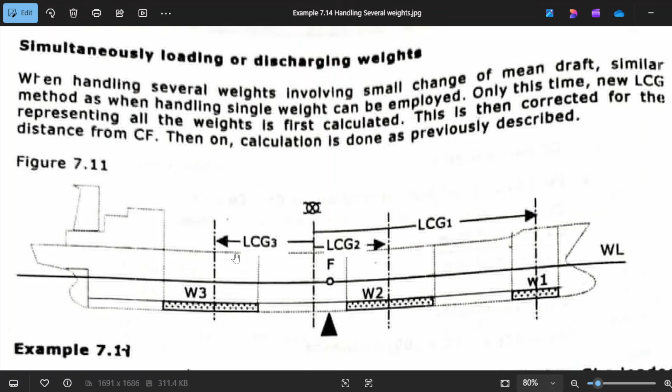Okay, so the example is 7.14, I think so. Check, guys. 7.11. So this is 7.14. Okay, so this is 7.14, and the vessel MV Max Panama had an initial forward draft of 3.75 meters, and aft draft is 7.09 meters.

She loaded IFO, MDO, freshwater to the following tanks and compartments. So it's loading FO and DO and freshwater. Okay, so this is FOT number 1, loading of 350 metric tons, and this is the LCG. Number 2 FOT port is 150, LCG is negative 9.67, FOT number 2 starboard, loading 200 metric tons, and the LCG is this one. And number 4 FOT tank, which is found in the center, loading of 250 metric tons, and the LCG is 42.95.

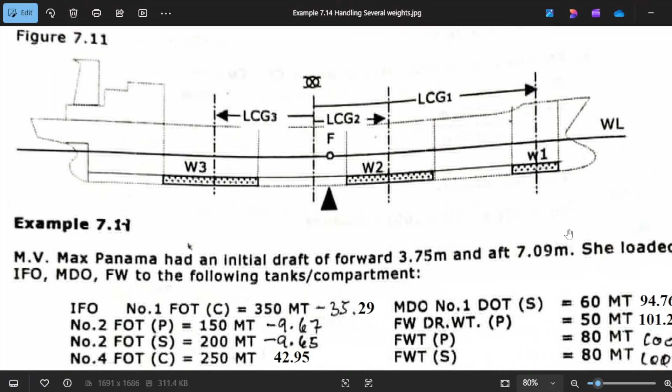And she will also discharge ballast water from the after peak of 589 metric tons, and the LCG is 104.15. Take note that after peak is positive, the LCG is positive, while the number 1 FOT forward or center is negative LCG. Okay, so meaning if the tank is somewhere around here, the LCG is negative. But if it is aft from the center or from the midship, the LCG is positive. Okay, that's why your after peak tank is positive.

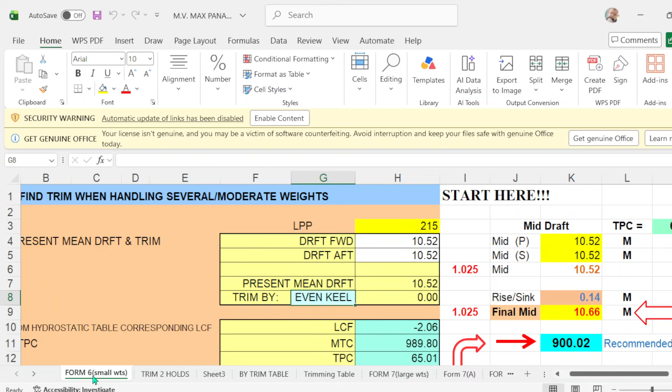Okay, so we will apply this to our program. I already entered this to the program, which is Max Panama. This is to show you. This is the name of the vessel, MV Max Panamax, or Panama. Then I use the program instead of using Form 6, which is this one, because this one is automatic. See? This is all automatic. So I use the manual.

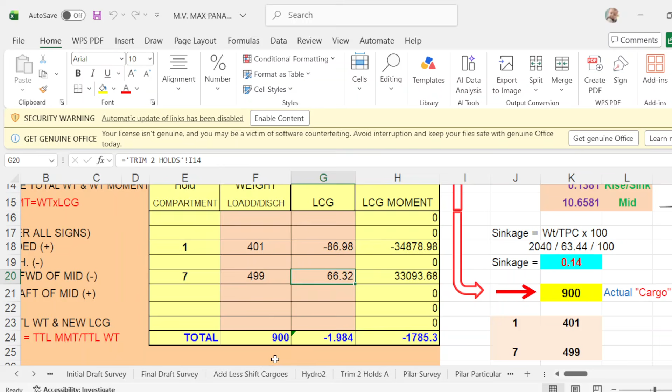So I go forward and I use this add. You add cargo or less, meaning you discharge or you shift cargo. So I use this one, and this is how it looks. Okay, it is also the same how to find trim when handling several weights. Okay, we will put now the initial draft. The initial draft forward is 3.75.

Okay, then you put 3.75, and aft draft is 7.09. Aft draft is 7.09. So you put 7.09. Take note that the present mean draft is 5.42, and it is trimmed by the stern.

Take note, guys. I will change this trim. I will put this to, let's say, 5, and this one to 2. Take note of the trim. Now it's trimmed by the head. It's trimmed forward, which is now negative 3. Okay. So if you put back the actual draft, it's by the stern of 3.34, and the midship is 5.42.

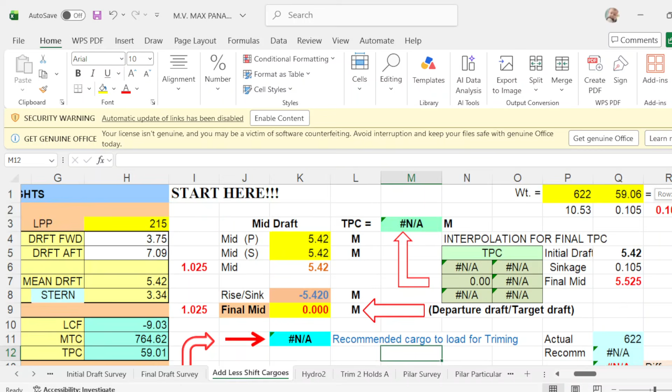Okay, we don't know the departure draft. So what you do is to put all the weights in your program. Okay, so I put here FOT number 1 center, the weight is 350, and LCG is negative 35.29. 35.29, right? That is the LCG. And number 2, FOT port side 150.

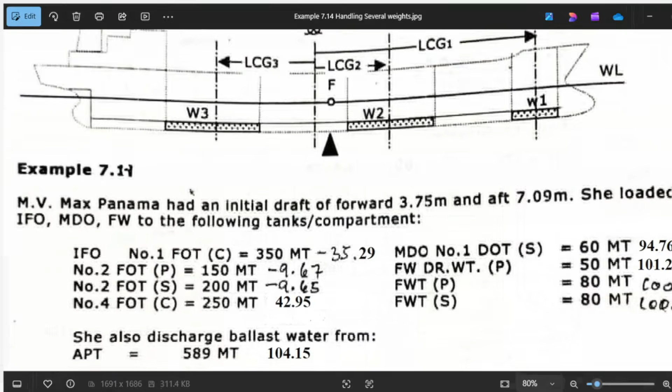FOT 2 port side 150, LCG is negative 9.67. LCG is negative 9.7. Then the next, FOT 2, now on starboard side, you load 200. Okay, she loaded IFO, DO, freshwater to the following tanks and compartments. So we are now in starboard side of FOT number 2, loading 200 metric tons. FOT 2 starboard, 200 metric tons, and the LCG is negative 9.65. Number 2 starboard is negative 9.65.

And next will be FOT number 4 center, loading of 250 metric tons. So FOT 4 center of 250 metric tons. The LCG will be 42.95. Then the next will be DOT number 1 starboard, 60 tons. So DOT starboard number 1, 60 tons, and the LCG is 94.76.

94.76, okay? And freshwater, drinking water on port side is 50 tons. Drinking water, port side, 50 tons. LCG is 101.2. And freshwater tank port side, 80 tons. Freshwater port side, 80 tons. And LCG is 100.99.

And freshwater tank starboard is 80 tons. LCG is 100.99. Freshwater starboard side is 80 and LCG is 100.99. All these figures are positive because you are loading. Okay. It says here. Where is that? Sir, consider all signs. When loaded, they are positive.

So aft peak discharge of 598, that will be negative, and LCG is 104.15.

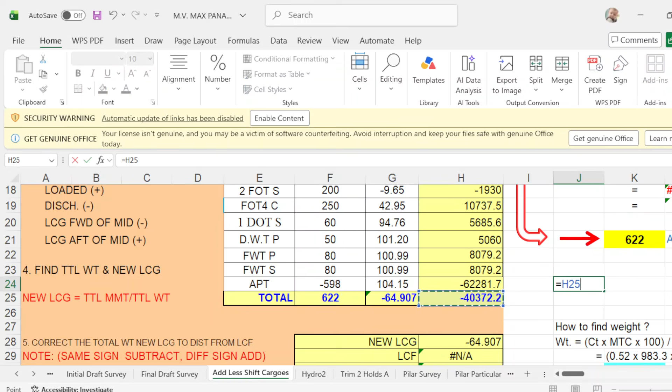And the total LCG moment will be negative 40372.2. To get the LCG, LCG moment divided by your total weight will be your final LCG. So your new LCG is 64.907. So we'll double check. Your new LCG is the LCG moment divided by your weight, and this will be your new final LCG. This is how you get this one.

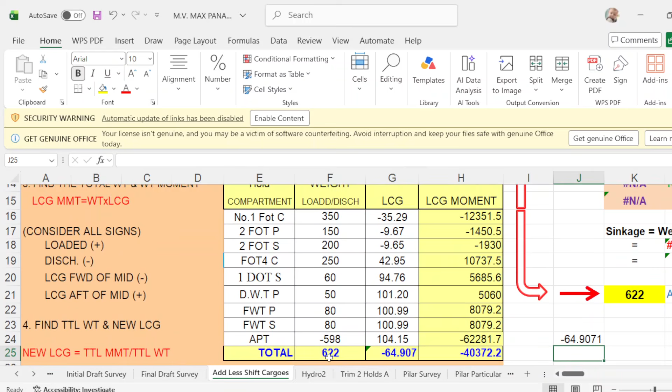Then scroll down. Since you know already the weight, you put the weight here, 622. And the TPC from your initial draft is 59.01. So put here 59.01. So your weight divided by your TPC is 10.54. Divide this by 100, that will be 0.105 meters.

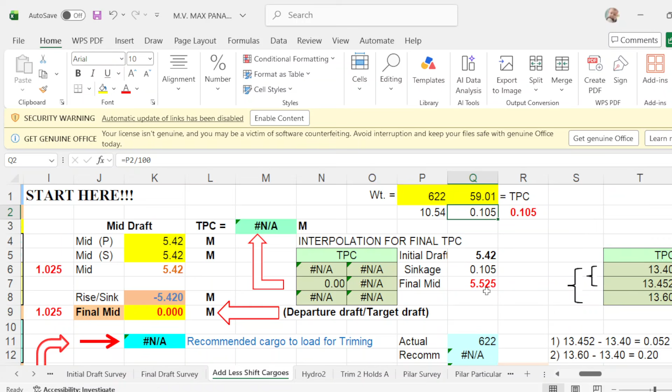So your initial draft is 5.42 plus your sinkage of 0.105, and your final mid will be 5.525. This will be your departure draft. With this figure, you put it here, your final mid. Put 5.525, press enter. Then your recommended cargo total for trimming is 620.

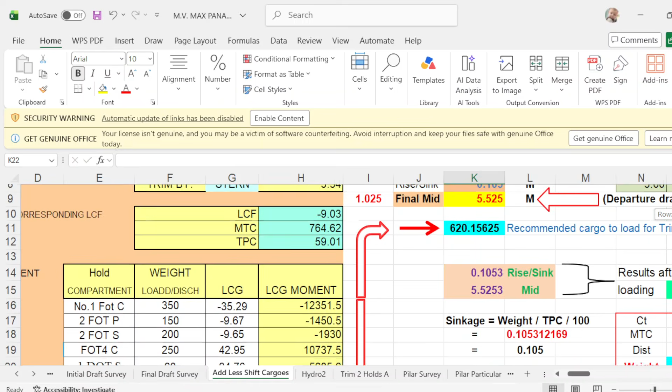But according to our program, you have already loaded 622. So since you follow this arrow, you put here 622. What happens if you load 622? Results after loading 622: your mid draft will be 5.525, which is almost the same here, and your sinkage is 0.105. That's how you get your sinkage.

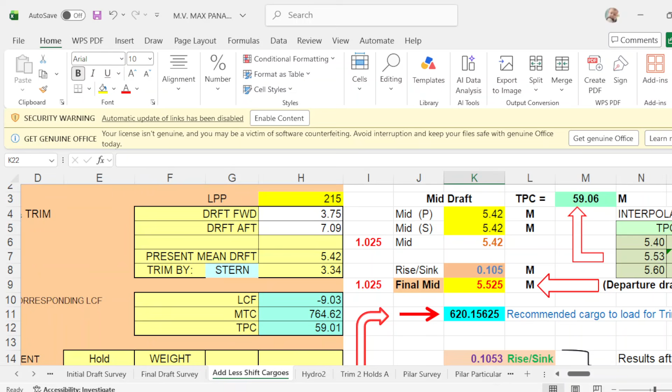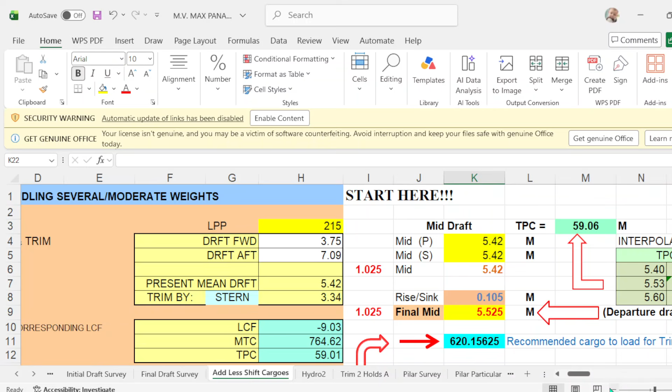Another way to get the sinkage is your final mid draft of 5.525 minus your mid draft of 5.42, which is 0.105. This is almost the same here. The other way of getting the sinkage is weight divided by TPC divided by 100. Your weight is 622 divided by TPC of your final mid, 5.52 or 5.53, which is 59.06.

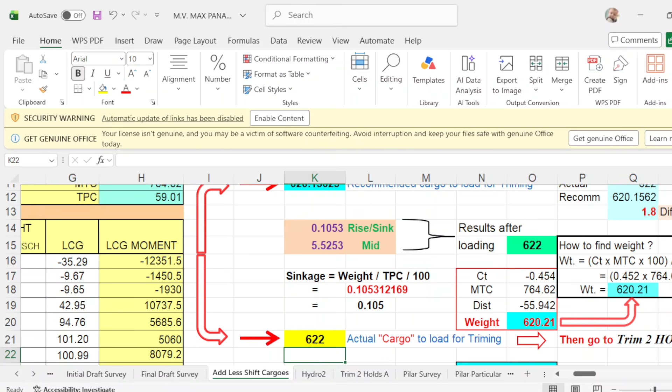So weight 622 divided by TPC of 59.01, divided by 100, then your sinkage is 0.105, which is almost the same here. So there are two ways now. Departure draft of 5.525 minus your mid draft of 5.42 will be 0.105. And the other way is weight divided by TPC divided by 100, that will be 0.105. Your weight is 622, your TPC of your departure draft is 59.01, divided by 100, then you will have your sinkage here.

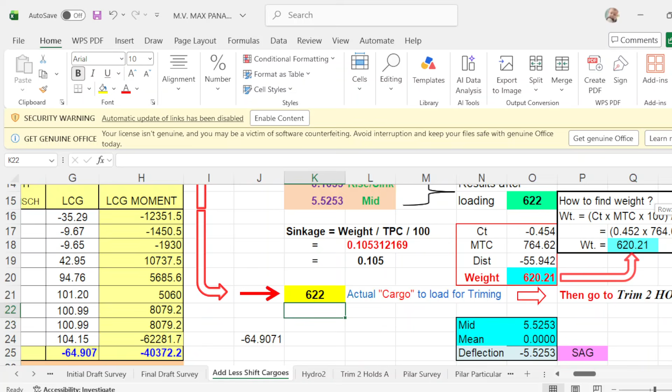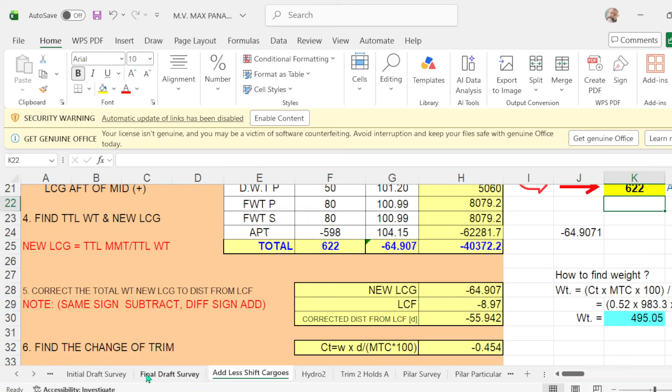Okay, then how to get the weight? How to find weight, how do you call this one? The trim. This is what you call the change of trim. Okay, change of trim. This one.

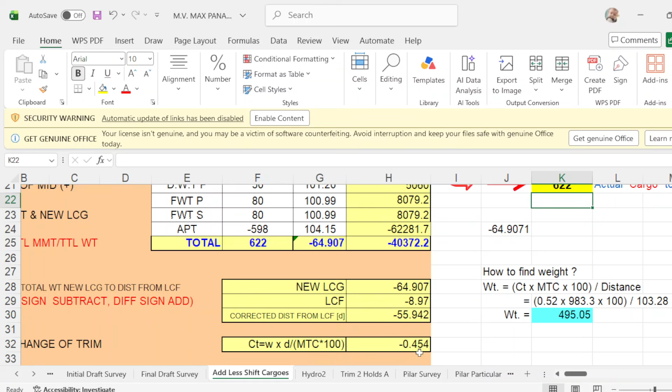To find weight: change of trim times MTC times 100 over distance. So what is your change of trim? This one: change of trim, MTC, and distance. So what is your change of trim? It is 0.454. Change of trim.

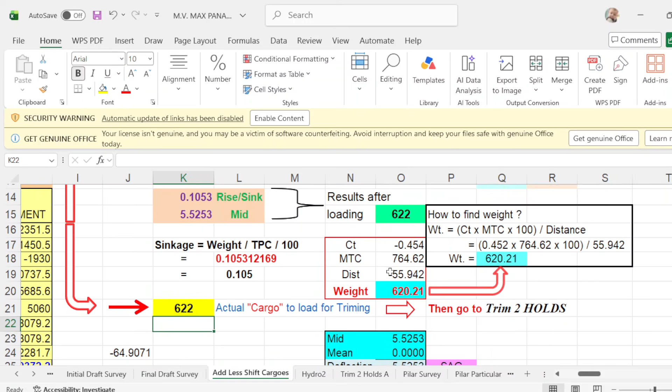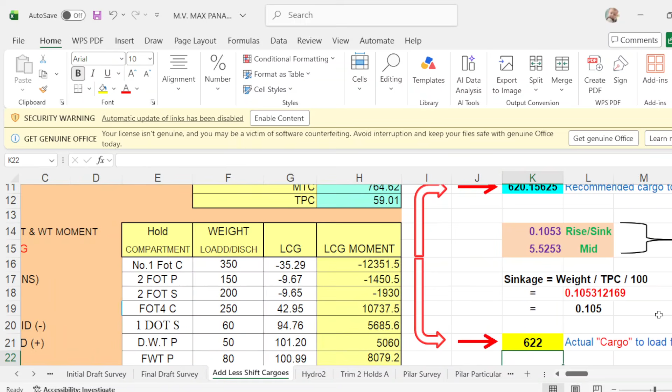0454, MTC is 7. From your initial draft is 764.62, and distance is negative 55.942. Distance is 55, that is the distance. This one. Corrected distance from LCF is 55.942. This one. 55.942. So change of trim is

0454. Put this 4. Okay. And MTC is 764.62. Okay. Times 100 over your distance of 55.942. Okay. 454, 764.62, and 55.942. And the weight is 620. But according to the program here, the weight should be 622. Okay.

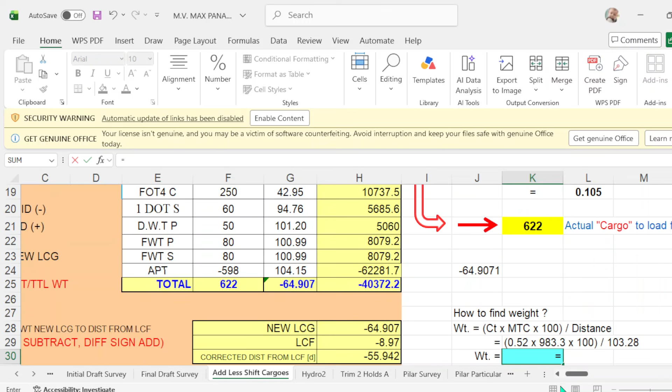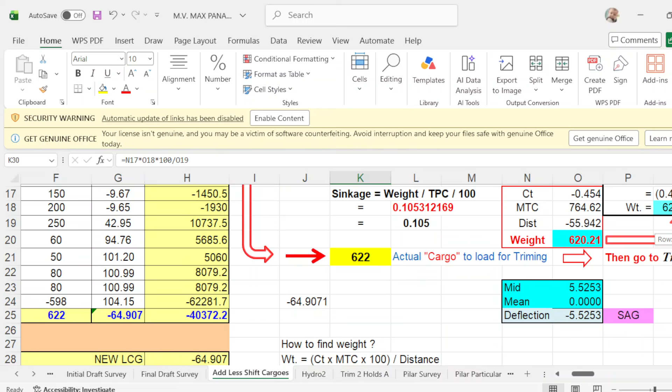What is the distance? Should be 55.942. Okay. Your trim should be 0.454. Okay. And your MTC should be, how much your MTC? 764.62.

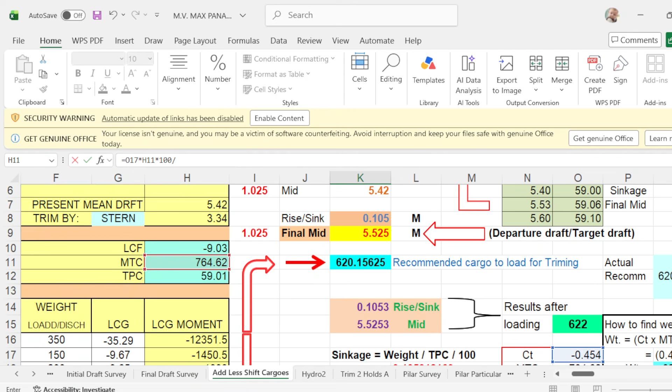Okay. Again, that equals change of trim times MTC times 100 divide distance. Your distance is 55. Push enter. There. Should be 620 according to the formula, but the program says 622. Okay? And what will be the draft after completion of this operation?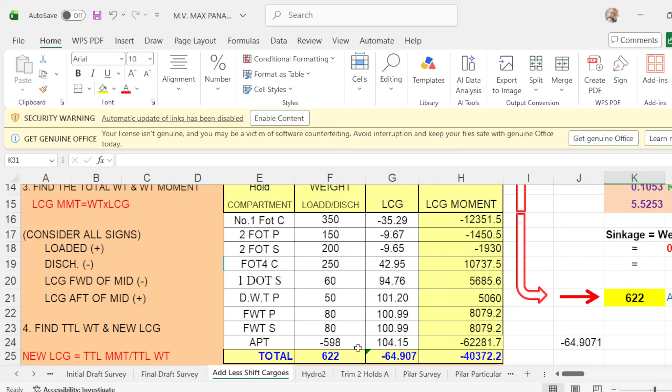You load these weights and discharge after peak of 598. Your final draft would be, forward draft will be 4.06, your aft draft will be 6.95, your trim will be 2.88 and mean draft will be 5.506, which is the same here. Mean draft is 5.506 and your trim is 2.886. Okay, that will be your mean draft.

Okay, so assuming that your total weight to load is 622. Then you go to trim holds 2. Then you have there 622. This is your initial draft, mean draft, and your trim, and MTC, LCF, and your TPC. Assuming this is a Panamax vessel that you're going to load 622 metric tons to 1 and 7. This is now different from this problem, okay? This is just additional information.

So with 622 tons, you're going to distribute this value to holds 1 and 7, for example, or we say 2 and 6. Put this to hold number 2 and hold number 6, okay? There. And they say, how much will be your trim? Trim says 2.88, so we put it 2.80, okay? So trim will be 2.80.

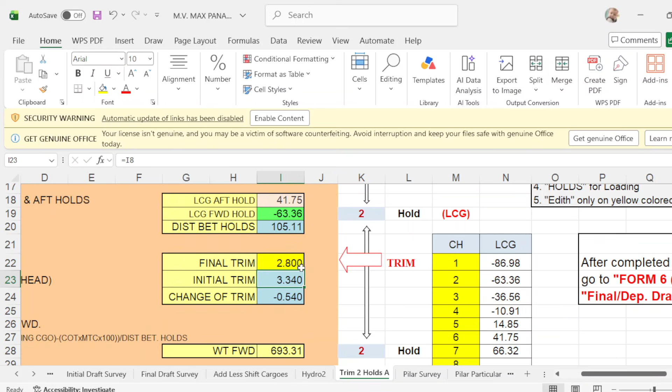So you have to load in number 2, or make it even keel, for example. Too much. Let's make it 2 meters. Let's make it 1.5 meters. Okay. So 1.5 meters doesn't work, because it's too much. You have to load 1,638, but you have only 622. So what do you do? 2.90. There you go.

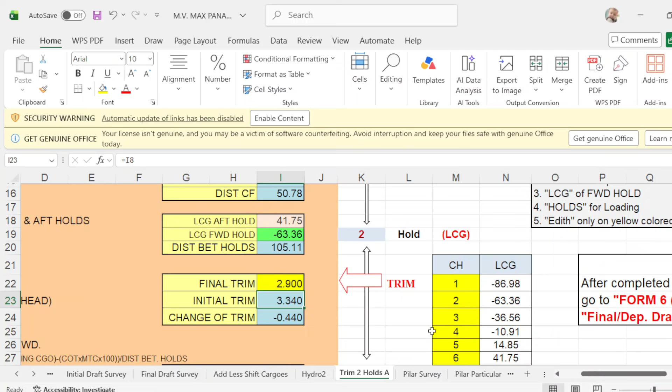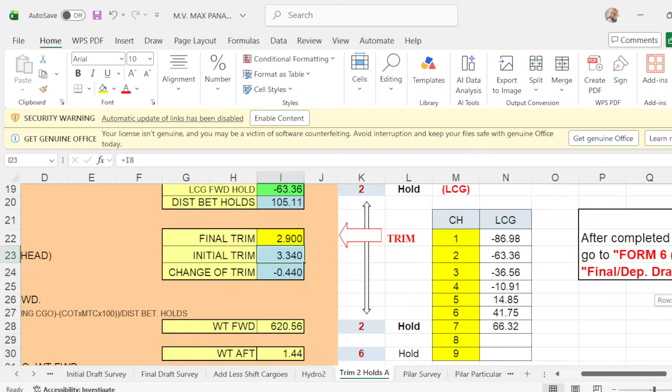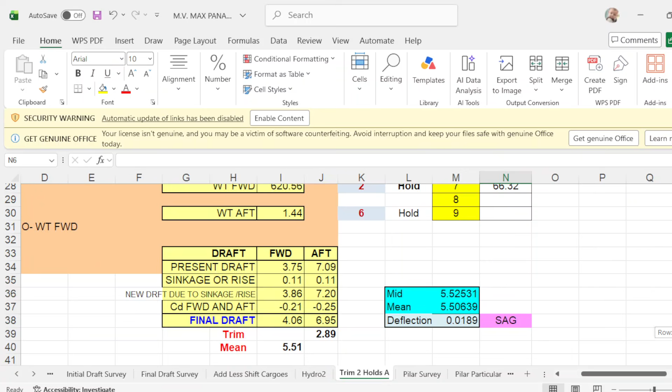Then you have to load in number 2 is 620. Okay, you put 620. And in number 6, you load 2 metric tons. Okay? And what will be your final draft? Draft forward is 4.06. Aft will be 6.95. Your trim is almost 2.89. And your mean draft is 5.51. Okay? This is assuming that you're going to load in hold number 2 and 6.

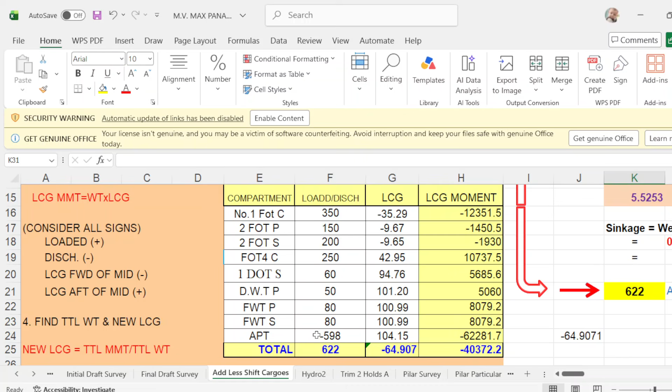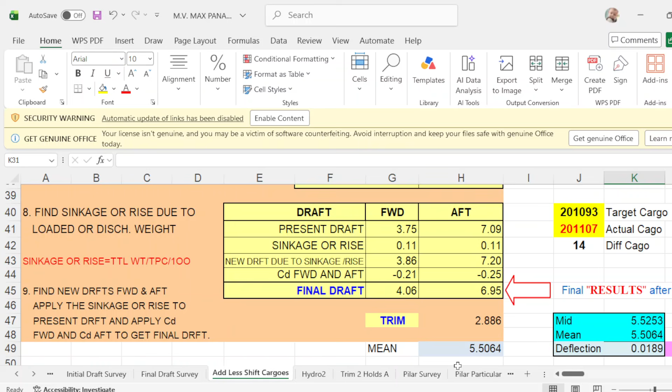This is for cargo, but the actual situation is when you load FOT center number 1, number 2 FOT starboard, FOT number 4 center, and you load diesel oil at DOT 1 starboard. You add water in drinking water port side, and port and starboard fresh water, you load this value. But you discharge your ballast water after peak, and the total weight to be loaded on board is 622. And you will arrive to this draft of forward 4.06, aft 6.95, trim 2.88, and your mean draft is 5.506. Which is this one.

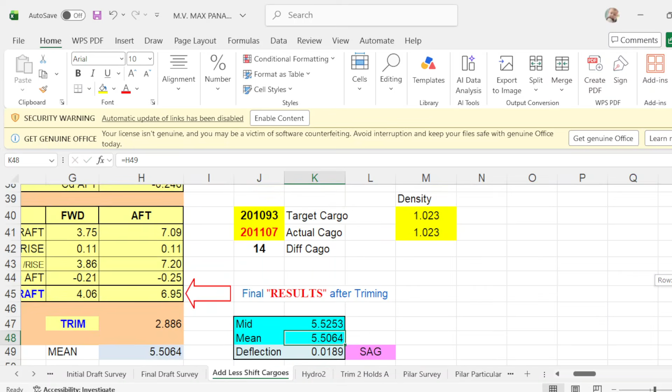If you apply all these tanks and the LCG, you will arrive to this draft. And the deflection will be 1 centimeter, almost 2 centimeters. How do you get the mid? Click this one, and your mid will be this one. When you load 622, this will be your mid, and your mean draft, put equals there, this will be your mean draft. And your deflection is your sag of 1 or 2 centimeters. Well, that's okay, because it's better to have sag than hog.

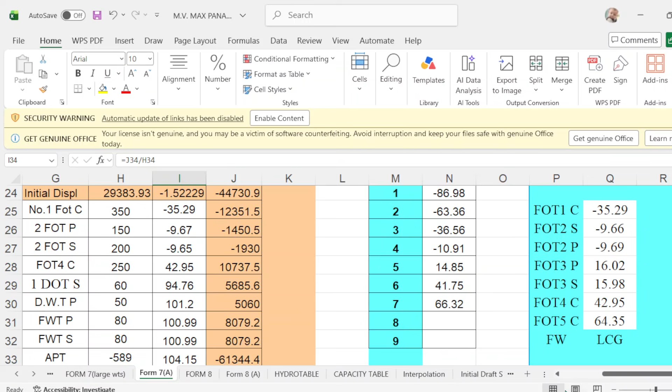So that's it, guys. This is how you apply this program here. Let's say we apply this to number 7. Okay, for number 7, the same thing.

You put the initial draft 3.75, and aft draft is 7.09. The mean draft is 5.42, and trim is 3.34. The initial density is 1.025, and upon completion of the operation it is 1.025. Okay?

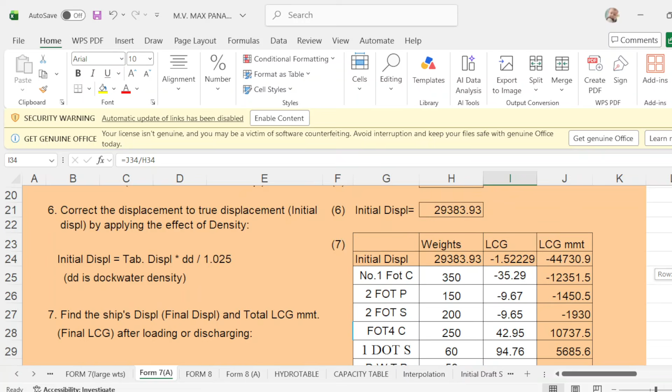Then you apply the tanks. No. 1 center, 350, No. 2 port, 150, and LCG is negative 9.67, and number 1 center is 35.29. FOT starboard 200, LCG is negative 9.65.

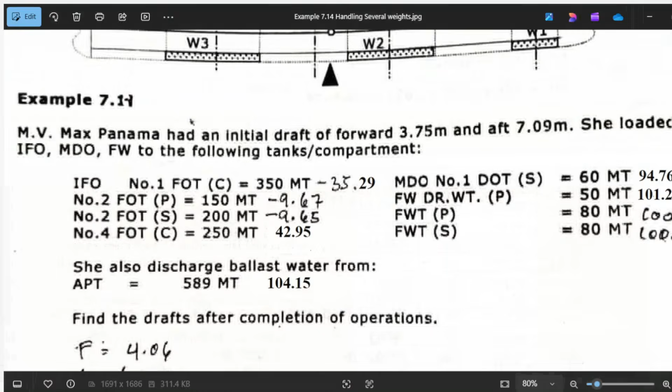FOT 4 center 250, LCG is 42.95. DOT 1 starboard 60, and LCG is 94.76. Drinking water port side 50, and 101.2 LCG.

Freshwater port side 80, LCG is 100.99, and starboard is 80, LCG is 100.99. And your after peak is 589, and LCG is 104.15. Okay. So it's confirmed.

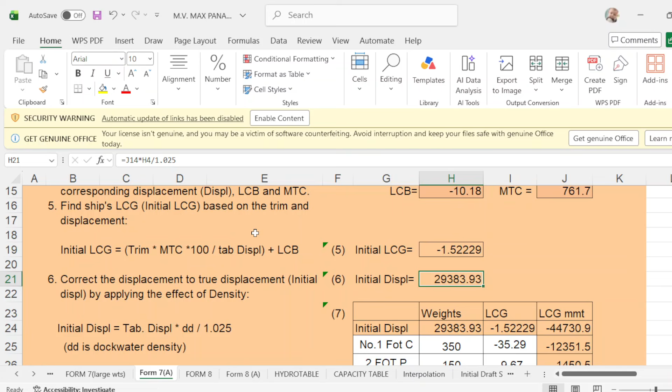I'll double check on this one. Okay. Correct. And this one. Then your midship draft should be 5.38. Midship draft is, there's something wrong here. So what you do, we double check. H34, 1.025 divide. Baliktad pa, I think. Double check, guys. Check this one.

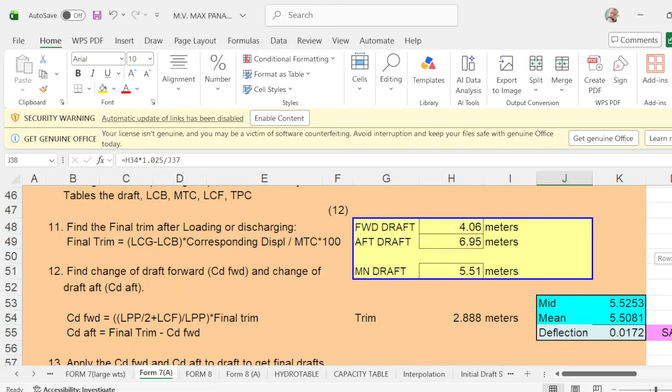Then we go to this one. That's 1.025 divided by J37. 5.28, 5.27. What will be LCB? LCB is 10.15, MTC 763.92. TPC 58.99. LCF negative 9.05. LCB 10.15. Okay.

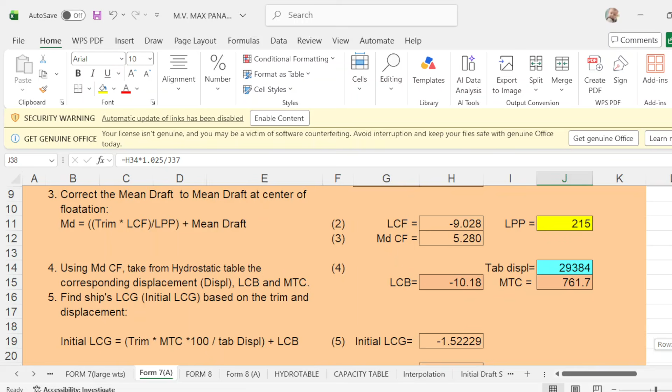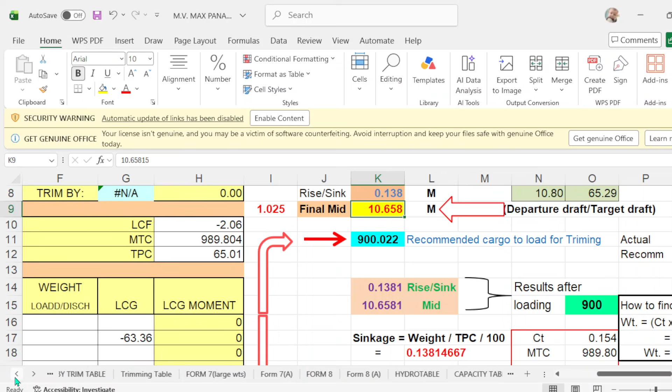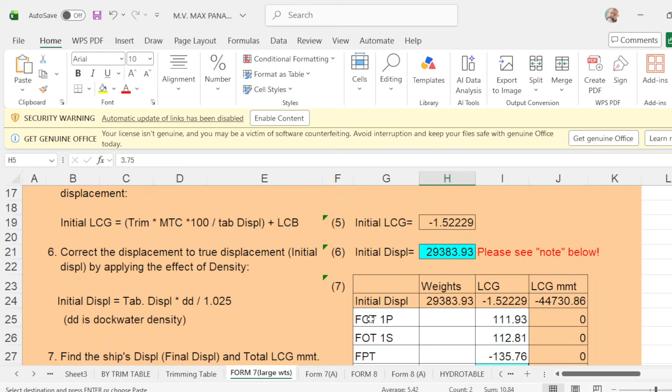The mean draft should be 5.51, but what it got here is different. There's something wrong with this program. So what we do, let's put it this way. I'll show you the program. Copy, put it here, paste. There you go. Then from here, you copy this one, go down, paste. There you go.

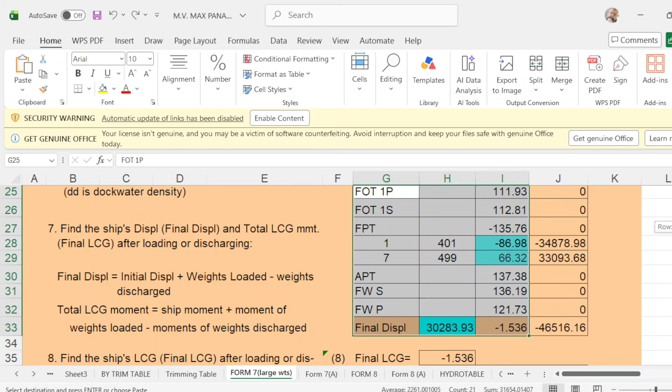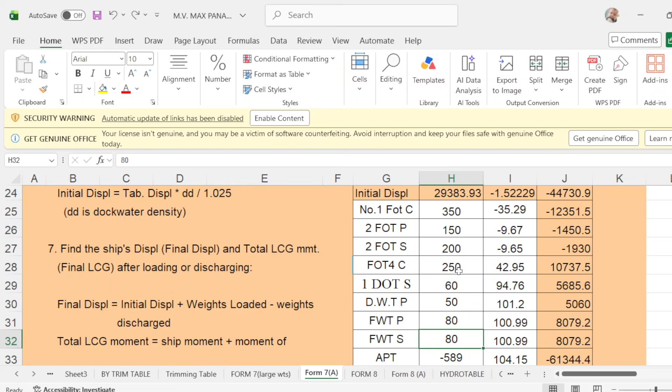And corresponding draft. Oh, I'm sorry. This is 1, 2, 3, 4, 5, 6, 7, 8. And this one, 1, 2, 3, 4, 5, 6, 7, 8, 9. So for this one, put an additional row. Then you put this one. Copy, then paste. Okay. The same.

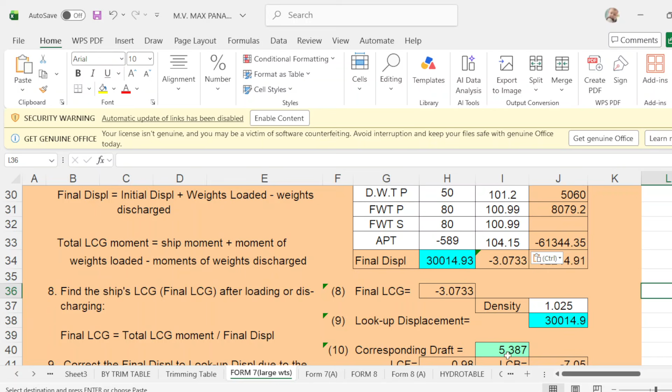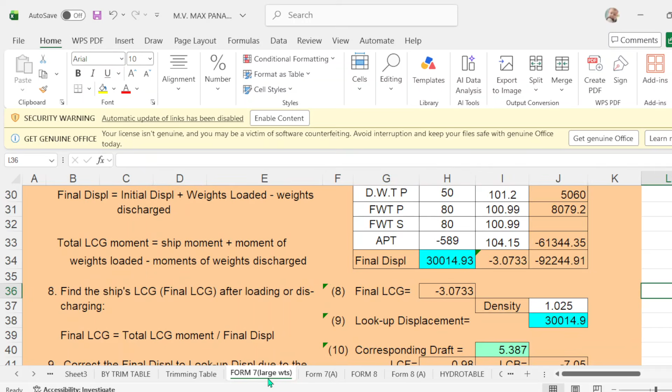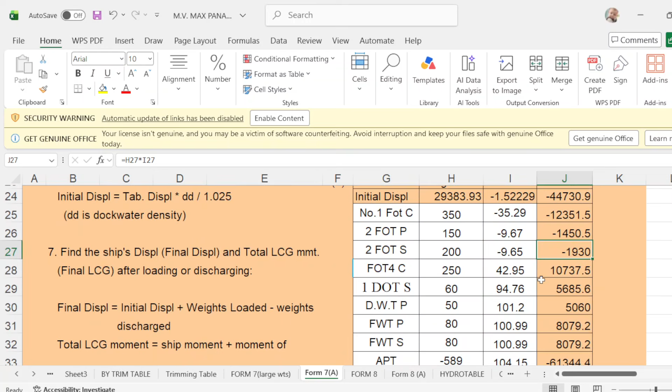Draft is 5.38, the same with this one. Now it's okay here. And here, what will be its draft? Now it's okay. The forward draft now is 4.06. Aft draft is 6.95. And your mean draft is 5.51. If you round it up, your trim is 2.88. And your deflection is 0. So applying all these weights, you will have this final displacement.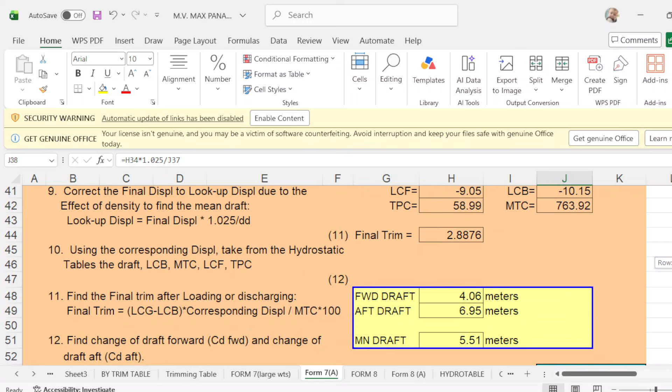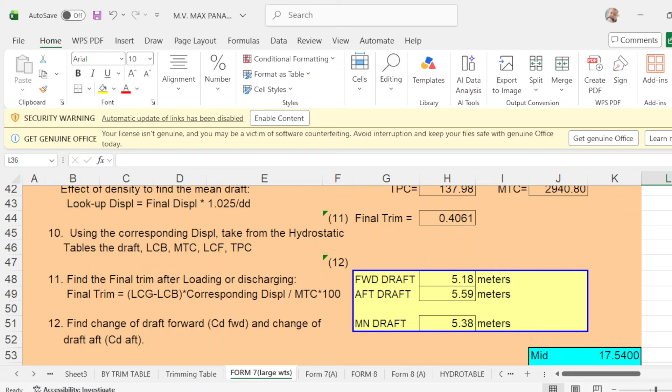This is your LCG moment. Divide by your displacement, that will be your final LCG of negative 2.80413. Then your displacement, multiply by your constant 1.025, divide by 1.025, that will be the same. And the corresponding draft will be 5.38. And your draft forward will be 4.06. This is 5.38. 3.87.

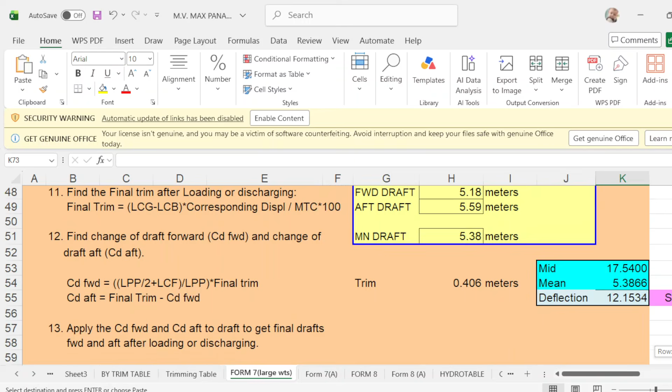But there is a corresponding, let me check. LCF is negative 9.05. But here it's 90. What we do is just click this one, copy, and paste it here. And what will be your draft here? Still the same. What will be your LCF here? LCF is negative 9.05.

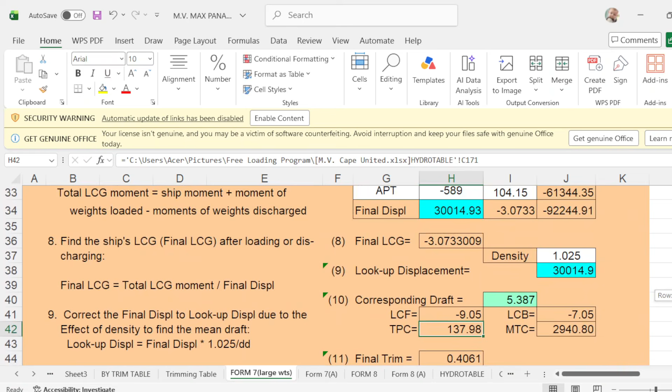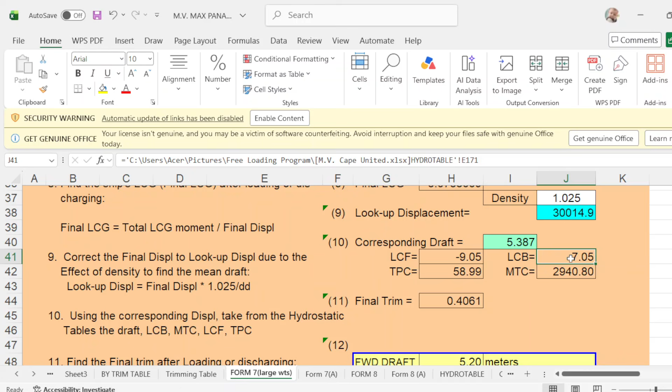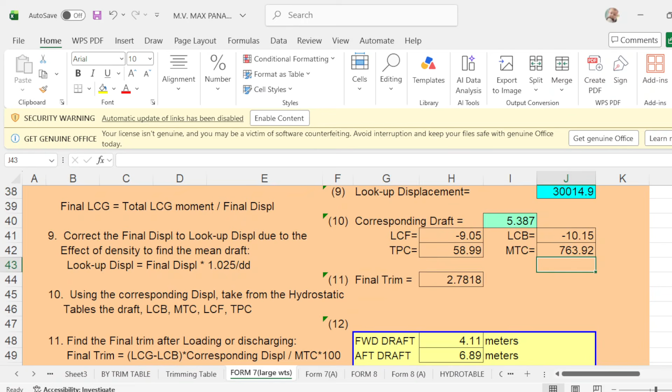Put your equals, then go back to LCF. LCF is negative 9.05, enter. Then your TPC, put equals, go to TPC. Your TPC is 58.99, enter. Then your LCB equals negative 10.15, and your MTC equals, go down to MTC, enter. Your draft forward is 4.11. You got here 4.06. There's something wrong with this program.

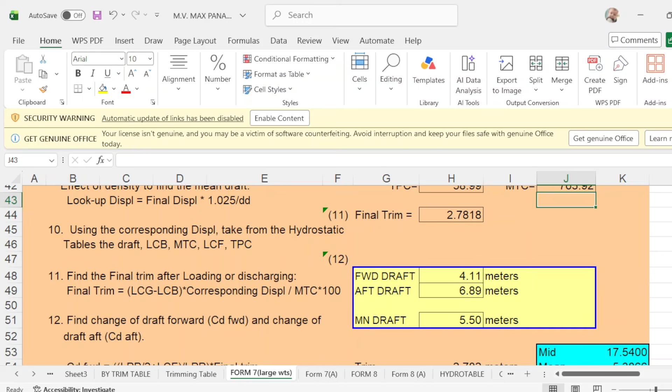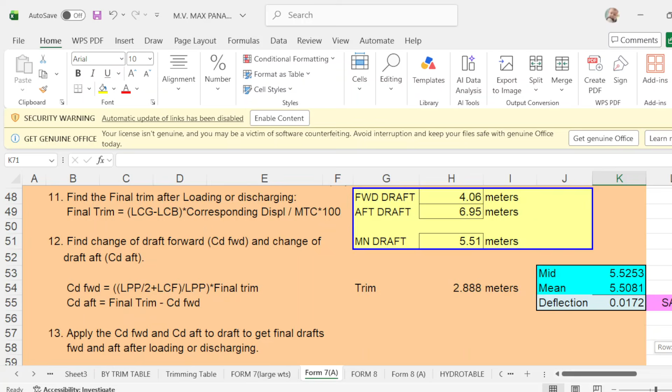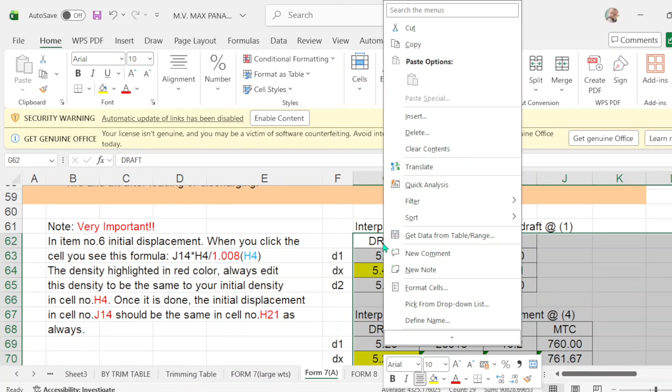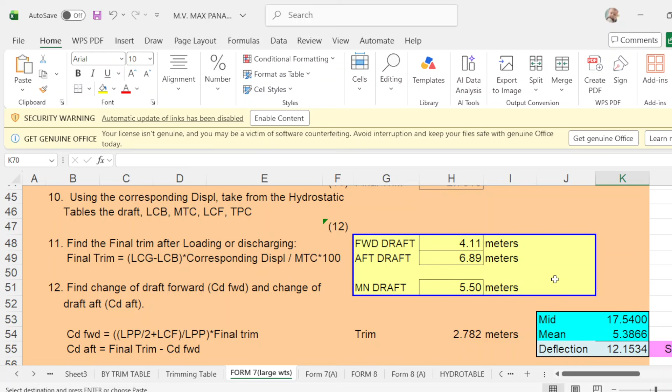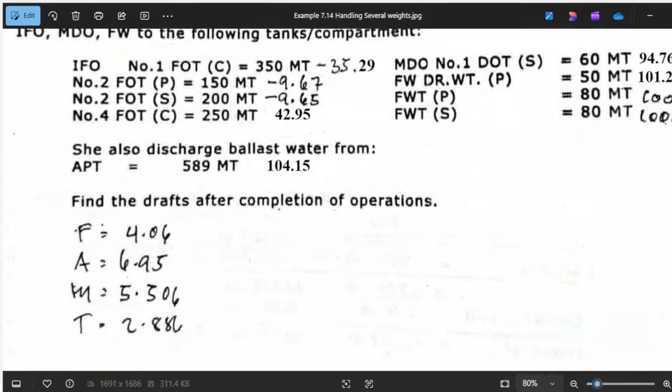But this one is okay. Your forward draft is 4.06, the same here. Aft is 6.95, and your mean draft is 5.51. Trim will be 2.88. And your deflection is up.

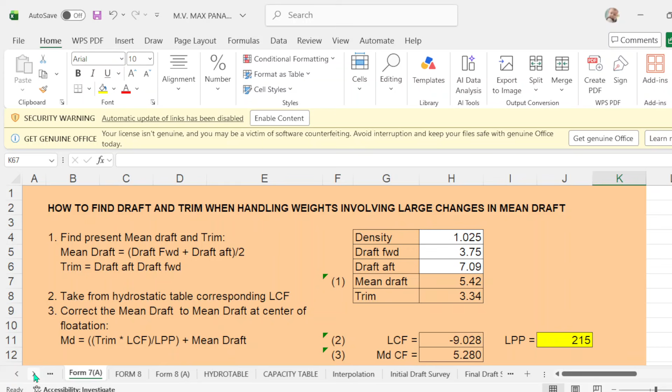This is form number 7, which is how to find draft and trim when handling weights involving large changes in mean draft. Take note, the mean draft is 5.42, trim is 3.34. They now have the same draft here. Forward 4.06, aft is 6.95, trim is 2.88 or 2.89, which is the same here. Okay, so that's it, guys.